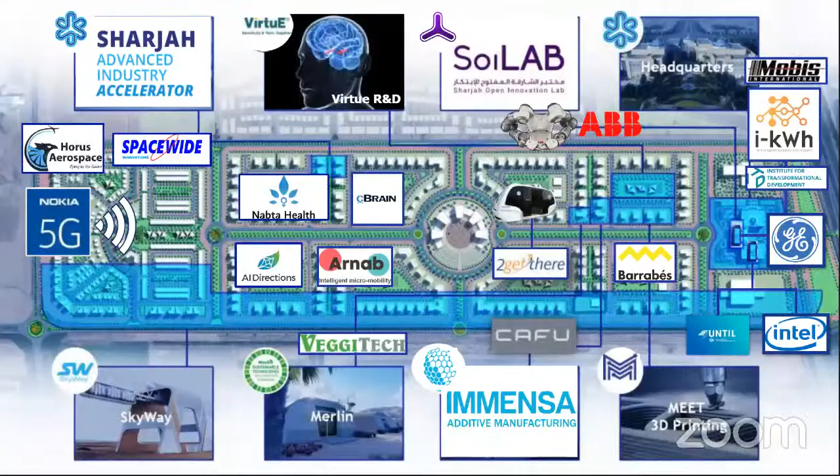This is the Skyway, one of the biggest transportation projects which we have on land. It has 4 different transportation pods. The biggest one is 3 kilometers in length. It goes up to 160 kilometers per hour. The final stage is under construction right now. If you visit the park, you will be able to see it.

We also have Merlin Sustainable Technology. It's a 100% sustainable ecosystem. It has an aquaponics farm connected to solar PV panels and wind turbines. It also has a water desalination unit for desalinating underground water and using it for irrigating the plants in the aquaponics farm.

This is Civil Twin Renewable Middle East, a solar PV panels company for testing different values for solar PV panels. This is Nabta Health, a British company, a startup here based at Sharjah SRTI Park. It's a women's tech health application.

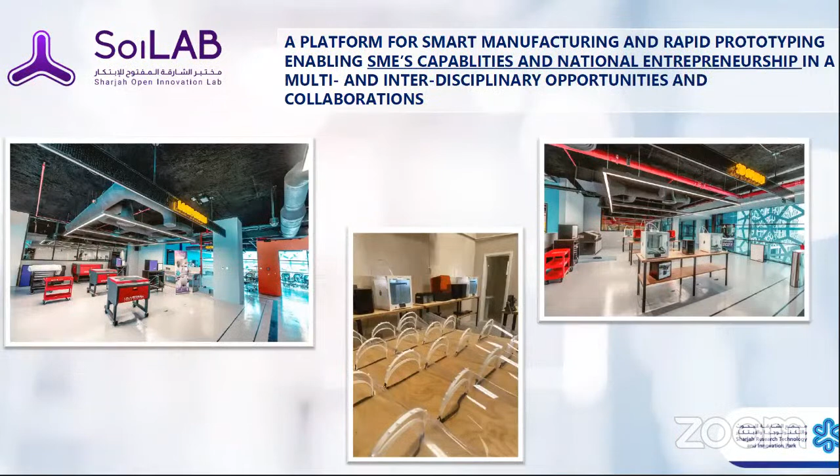SoiLAB is one of the biggest makerspaces here. It combines 3D printing for plastic and metal, and it has 6 different labs for electrical, textiles, woodcutting, 3D printing, and so on. It has 2 floors dedicated for 3D printing, and we have a floor for Immensa as well, which specializes in metal and plastic 3D printing.

This is our framework collaboration with American University of Sharjah. It focuses on 4 main objectives.

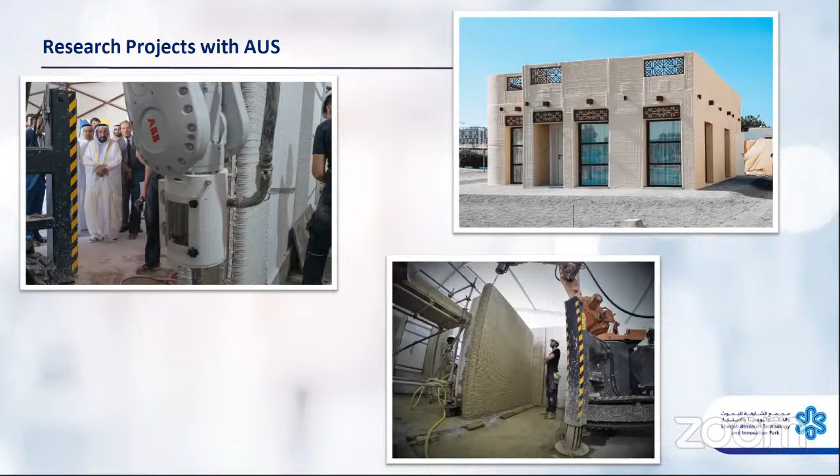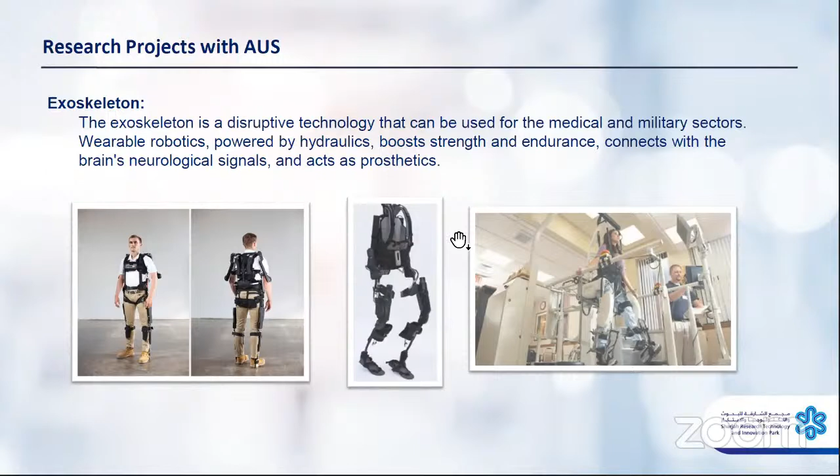Another one is the conductive concrete project with the American University of Sharjah. We also have the exoskeleton, which is a disruptive technology for wearable robotics.

One of our global activations is the Women in Technology Forum, which happened back in February last year. We also did one this year as well, but it was virtual.

We launched the first advanced industry accelerator. It focused on 8 main pillars.

So we also launched the Sharjah Angel Investors connection or network, which is to enable the startups to access local investors here.

When we launched back in September, the first event was dedicated for 3D printing. It was called the 3D Printing Emerging Tech Exhibition. It lasted for 2 months. It showcased the capabilities of 3D printing, including plastics, metal, and concrete. We also had different participations from students who 3D printed a lot of amazing pieces.

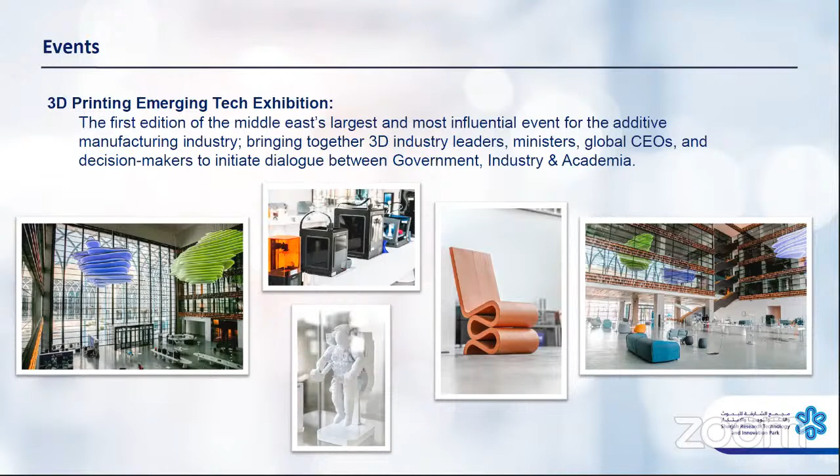So we have a lot of upcoming activities. We're launching the Smart City exhibition, the second exhibition to launch in our building. We are also launching the MENA Innovation Technology Transfer Summit in September. So yeah, thank you.

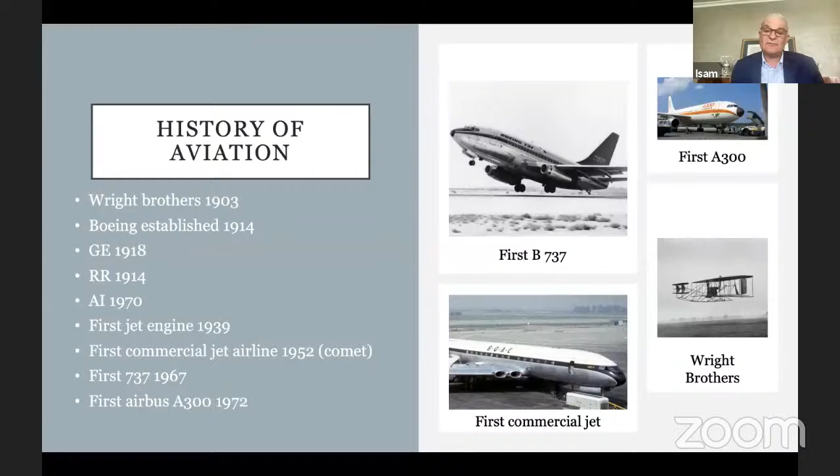And also at the same time, the move from normal propellers to turbojets happened during World War II, and then by the end of the war, it just kicked off. So it was a disruptive technology and moved the industry way forward.

Now, a group of people put out a paper recently during one of the IATA conferences about the items that will affect the aviation future. The first one was the emergence of the middle class in Africa and in Asia. We all saw what happened in China and the immense pressure it put on the aviation industry to support Chinese travel when China opened up to outside travel and established many industrial hubs that required a lot of interconnectivity.

Data is a very important subject because today, of course, data is not democratized across the industry, and the emergence of the Googles and the Facebooks in the world has led to a major shift on who owns the data and how much data these companies own versus the airlines and the travel market. So if the world moves into sharing data, I think it will help the aviation industry grow a lot. If it becomes basically torn apart in islands, I think it will negatively affect it. So a lot of people talk about the effect of data, who owns data, how you use data.

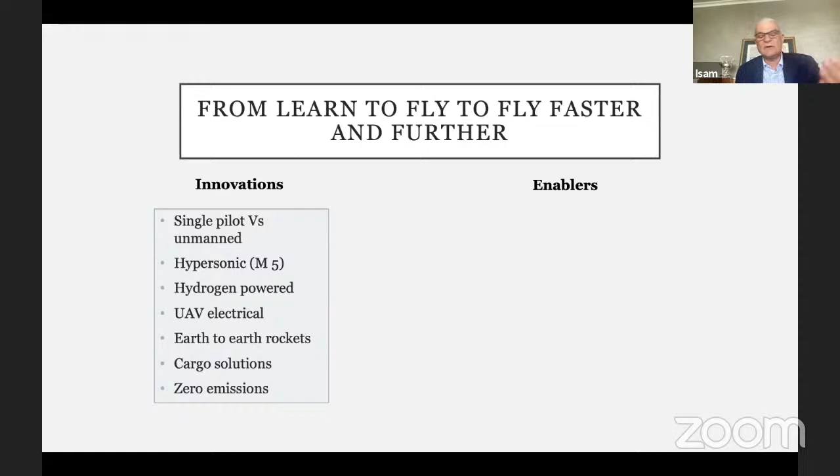We talked, we all heard about the hyperloops, how to transport people really fast on the ground. So aviation also needs to think in that domain. We talked about the emissions and the cargo solutions earlier.

What are the enablers? I think my colleagues here are going to talk a little bit about it. The material is very important, coming up with ultralight material that allows people to be transported fast, efficient, and with lower emission. The current material that we carry is heavy and requires a tremendous amount of thrust to move it from one place to another.

Alternative fuels, we talked about the resource wars. Who would come up with fuels that will be able to replace the fossil fuels that are being used today? The introduction, of course, of artificial intelligence and robotics in controlling the airspace.

How do we come up with new propulsion? Pratt & Whitney, GE, Rolls-Royce, everyone is testing new propulsion systems that are going to revolutionize the industry, to be able to support those great ideas that we talked about.

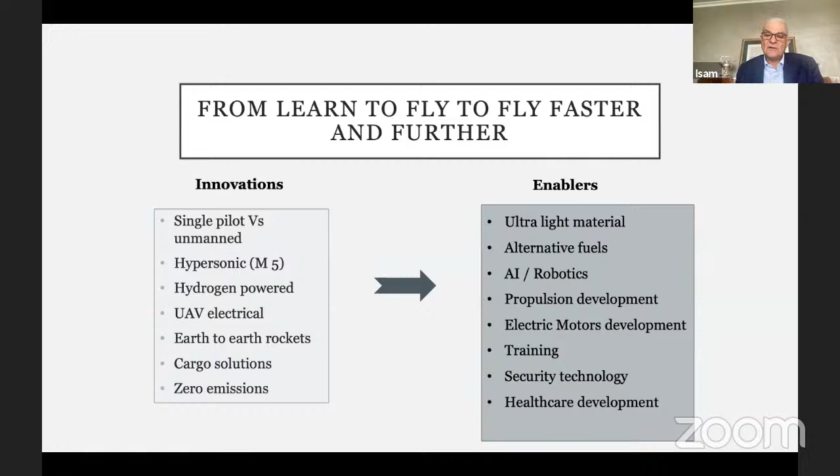Training and security technology are very crucial in preparing people for what's going to happen. The last one is now the introduction of the healthcare factor into the industry. As we go from one place to another, and with the introduction of vaccination and the idea of trying to control who travels, who goes where, I think we need also a new look from a healthcare perspective on how to support the industry from a healthcare solution.

Here I will show you quickly a few of the ideas. Those airplanes, the bottom one in particular was shown at the Paris Air Show. It is actually there. It's an electrical plane that can fly between cities or even within a city. It can carry up to 6 people. It's fully electrical with batteries.

The top one is another idea that works on 14 passengers, all electrical or hybrid at one point. To the right, we have basically the NASA design, called the double bubble. It's 2 airplanes welded together, and underneath at the tail you could see 3 engines that could be either burning alternative fuel or hybrid electric, so starting as a jet engine, then converting into electricity, making electricity and going on electricity. It's an actual model, designed by NASA in collaboration with MIT and a few other companies working with them.

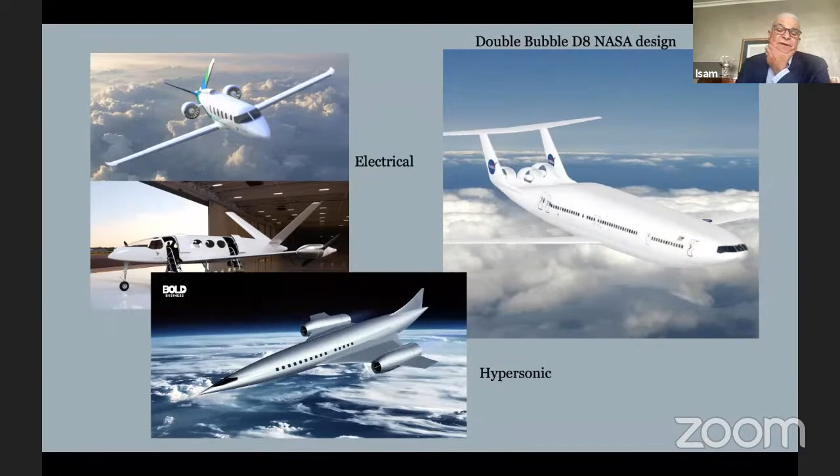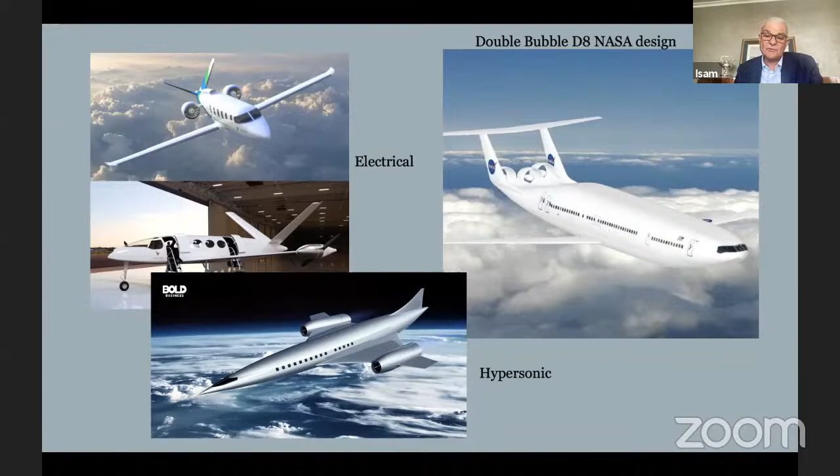But this is the hypersonic airplane. Again, it's based on conventional technology, but modified aerodynamics to be able to go to the stratosphere at 45,000 feet or even higher, and go at 5 Mach. So this is an actual idea, and I think a prototype has started flying recently.

Here is what Boeing is coming up with, the sugar volt design concept, basically an ultra long wingspan supported by trusses, as you can see here, has 2 engines. They are hybrid turbofans, so basically they start with conventional fuel and then convert to electric motors and fly with it. Of course, that will require modification of the airports because that wing is huge and no airport can accommodate it.

So either they'll be breaking the wing at the middle like they did with the new 777 that is coming out next year, or it will require a special terminal to be able to park a plane of that size. So everybody's still going bigger airplanes, bigger wingspan, trying to go further, but of course eco-friendly with almost very, very little emission compared to existing planes.

This is the Airbus Zero-E. It is basically a hydrogen-powered aircraft. You see the multiple engines in the back, and basically it's supported, so it's burning hydrogen. So the exhaust is water.

And then you have hydrogen fuel cells that are powering the aircraft. A prototype of this aircraft has already flown, so it is a proven concept, let's say, but it's out there and it's flying.

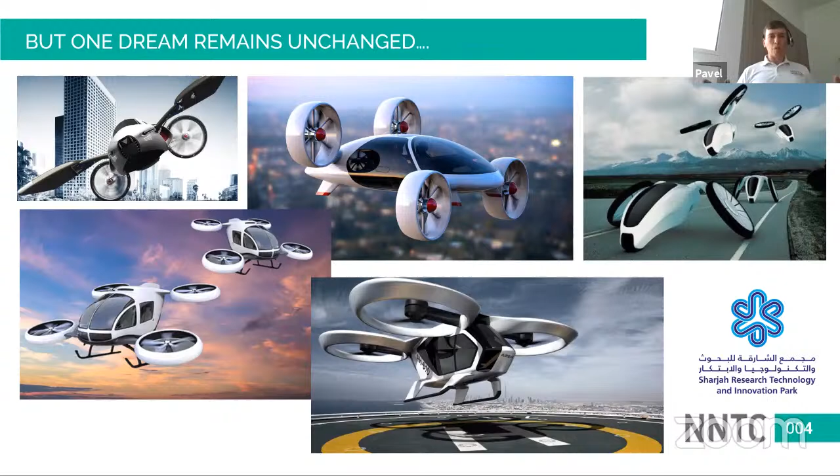The interesting thing is that if you look at these pictures on the slide, these are all about what the general public today calls drones. If we look into the history, let's ask the major question: what is a drone? In fact, the drone as a term appeared in the beginning of the 20th century, when the first artificial targets for anti-aircraft weapons were designed, and that's what was coined as a drone at that time.

Today, if we think about drones, it's called UAV, UAS, RPAS, and so on. These are abbreviations which basically define unmanned flying machines. But again, in a general understanding, when we say the word drone, most people would think about multicopters.

If you look at the old photo in the upper left corner, that's the first quadcopter ever constructed by humanity, built in the beginning of the 20th century. The question is, why didn't it fly? It actually flew somehow, but it was proven that this design is not practical.

If you look at the bottom left corner, there's a modern industrial drone made by the market leader, which is widespread today and used in many industrial applications. As Mr. Isam mentioned, there are a lot of applications, for example, for the inspection of power lines, and that's been happening today.

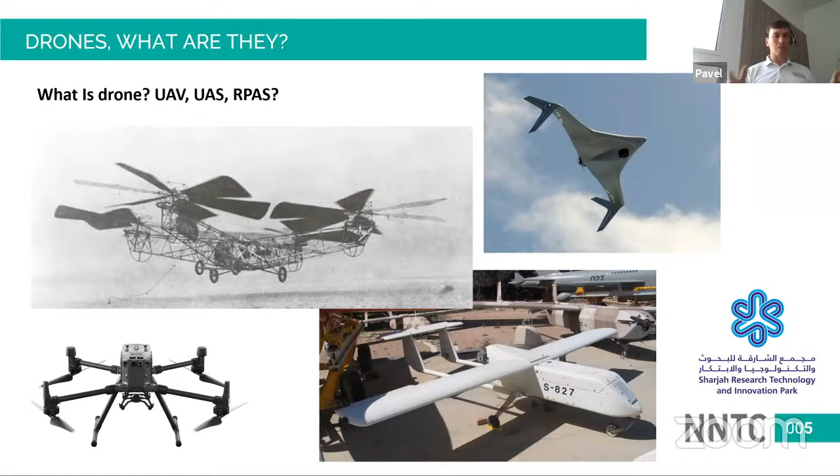So what made it possible? Here we really need to speak about the technology. That was the materials, batteries, microelectronics, and motor technologies. That's what changed from the beginning of the 20th century to the beginning of the 21st. Those are basically the several basic technologies which made what we call drones or multicopters possible.

But the question is, why are they so popular? That's an interesting thing to discuss. If you look at the picture here, what do you really see? Do you see the aviation engineer flying this thing, or maybe the test pilot? Not really, and that's what technology disruption did to this industry.

Most of the multicopters, quadcopters, hexacopters, or whatever copters are on the market today, are usually designed by programmers, by IT guys who are very good at writing code and doing the math, but they are not really excellent at aircraft engineering, which is a really specific and complicated science.

So what are the pros of multicopters? They are really easy to build and maintain, up until a certain size. They are easy to fly and operate.

This is an interesting misperception by the public, because as consumers, we go to the shop, buy a drone, usually a quadcopter with a remote control, and once we take the remote control, it's really easy to fly. But it's not so from the aerodynamic point of view, because originally multicopters are not really stable. It's the software and microelectronics which makes them easy to fly.

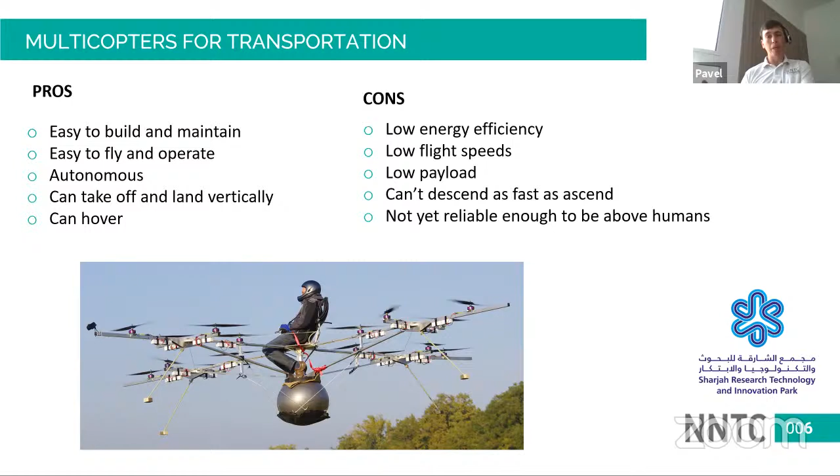And that's not speaking about transporting the humans, which is a completely different story. So if we look at the transport, say cargo or the flying taxis, what should be the properties of these machines to make them commercially and practically successful?

We still think about vertical takeoff and landing because the majority of these operations are taken care of in the cities. We are not going to build runways on the roof of every building for traditional airplanes. They still need to hover, especially for delivery applications where you need to hover above a certain point and deliver the cargo down with a winch or some sort of container. That's what's being tested in many parts of the world today by commercial companies.

How, for example, Amazon or Google, they all test this kind of thing to deliver goods. Moreover, there are several commercial applications which happen. There are actually two very interesting projects in the world that are commercially successful delivering medicines to remote areas, and this hovering capability was really required there.

They have to be autonomous, so the intelligence and all the software pieces still must be there, because we are going to tell the drone the point to fly, we probably will tell the route to fly, but a certain degree of intelligence should still be on board in order to fly inside cities, because we can have other air traffic, we can have different obstacles which we don't know from the control perspective.

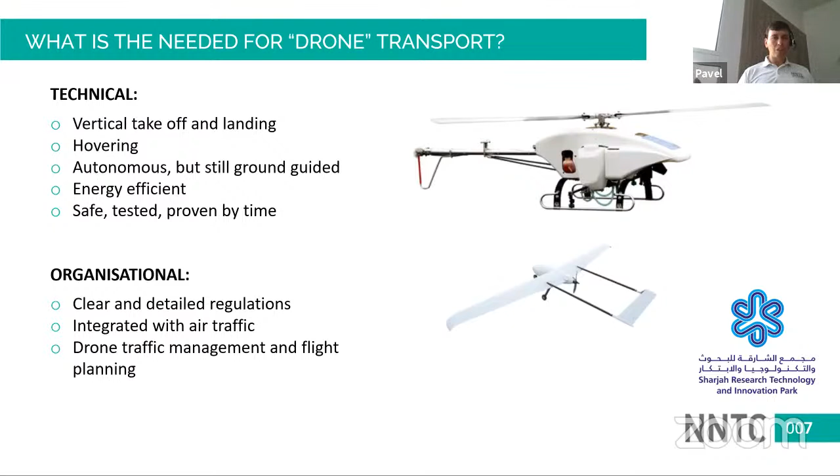Where the world is today in terms of that technology is basically at the stage of designing more efficient flying machines. And if you look at traditional aviation, the most efficient and practical machine which can take off vertically, land, and hover is basically the traditional helicopter. And there are several types of them, and the most efficient of them is actually the coaxial helicopter.

And that's what we actually wanted to show today with our partners who develop a modern UAV for cargo, basically the coaxial helicopter drone, which does the job in the most efficient way at a smaller scale than a traditional helicopter. If you look at this particular slide, you will see what is being flown today as an experimental aircraft, and there were several of them already produced. This is the first commercial, not military, coaxial helicopter drone which can carry up to 100 kilograms.

If you look at this, what the developers and engineers tried to build here is they were taking the best from the traditional aviation world and bringing it to the smaller scale, in order to make this machine efficient, safe, and very capable in terms of transport and goods. That's what is reflected in the technical characteristics of this machine.

It can fly up to 6 hours, it flies at least twice as fast as a multicopter, and it has a huge practical range, which enables it to be used in traditional areas like delivering small cargo to oil rigs in the sea, or delivering emergency supplies to remote areas of countries or outside of cities.

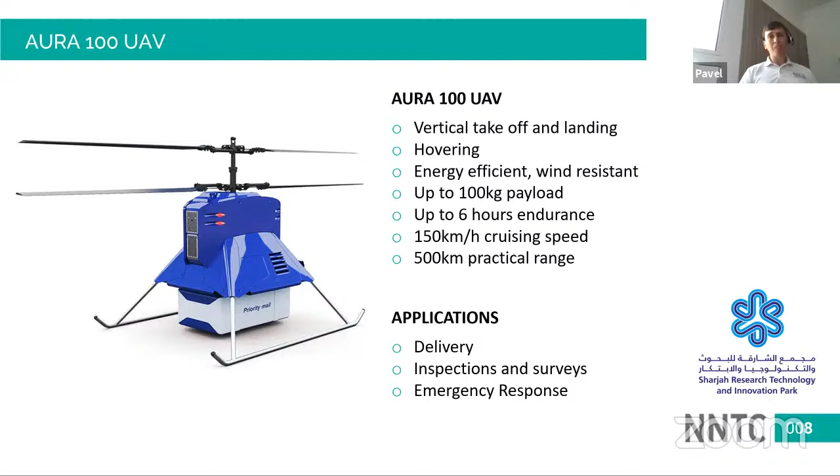So that would be the first step, right? At the same time, we as a company also developed the software which operates the machines.

We provide ADS-B support, where we really know the location of other aircraft, and it's capable of controlling multiple UAVs, providing real-time video streaming, telemetry, and so on. It supports multiple autopilots.

That's, say, the first small technical steps in order to enable this industry to become more efficient and better, and more commercially successful. Hopefully we'll see more development from the competition, from the authorities, and from engineers all around the world to support this industry more and more, and get to the dreams of humanity.

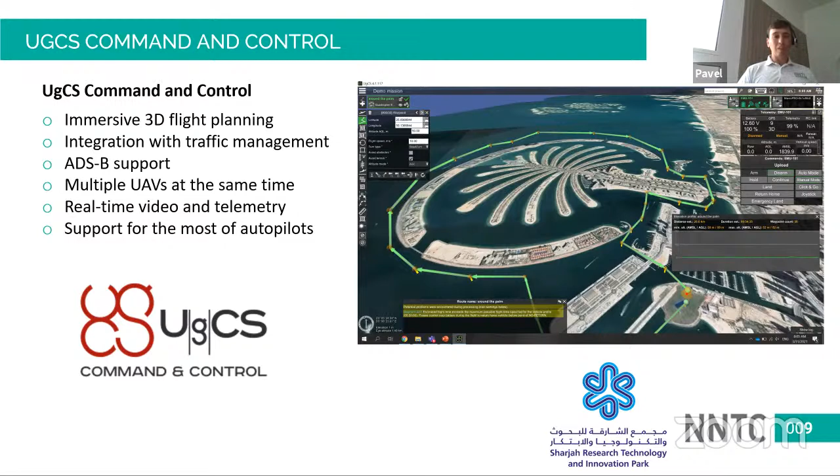When you can call an Uber-style drone which will take your package from your balcony and deliver it to your business partner on the other side of the city in, say, 20 minutes, without driving through the whole city or the post. That's basically everything I wanted to tell you today.

Feel free to ask questions, and reach us out if you find it interesting to discuss.

So this one is, I think, for Mr. Isam. Can aerospace manufacturers and airlines guarantee that the limits of human attention won't compromise passenger safety during autonomous rides, basically?

Very good question, thank you. Just let me tell you that last year, the US Navy successfully tested with one of the manufacturers a fully deployed airplane that took off unmanned from a carrier in the middle of the ocean, did the mission, and came back and landed safely. So the technology is definitely there.

The unmanned aircraft, and Mr. Pavel has given us a very good insight into the technology, is quite capable of launching a mission and landing it. Basically today on a 787, for example, or an A350, after takeoff you can switch the airplane into automatic mode, and it will fly and land automatically without any intervention from the pilot or co-pilot, apart from doing the communication.